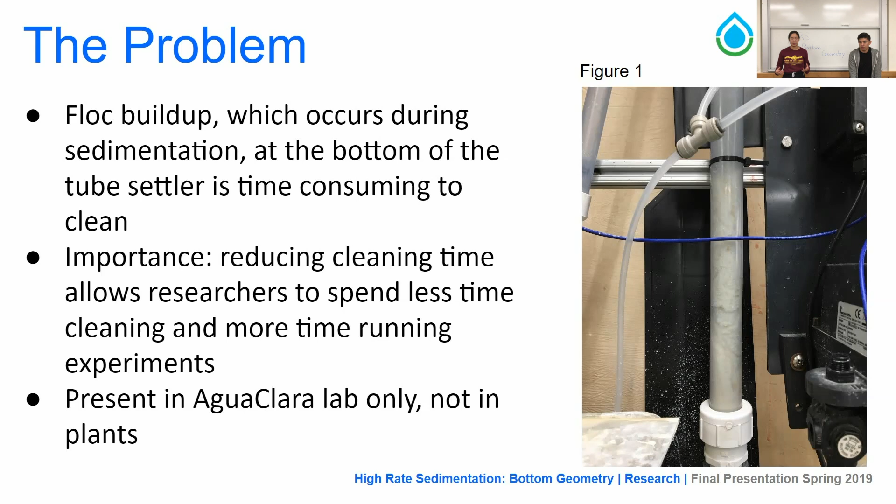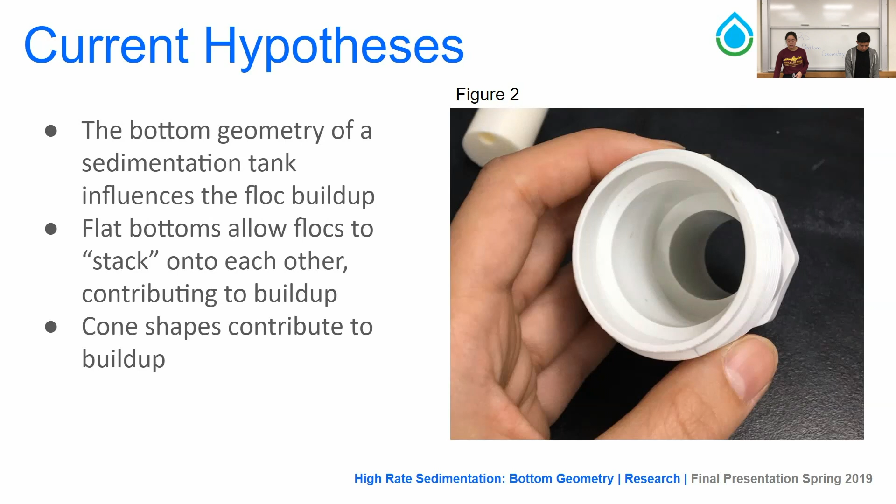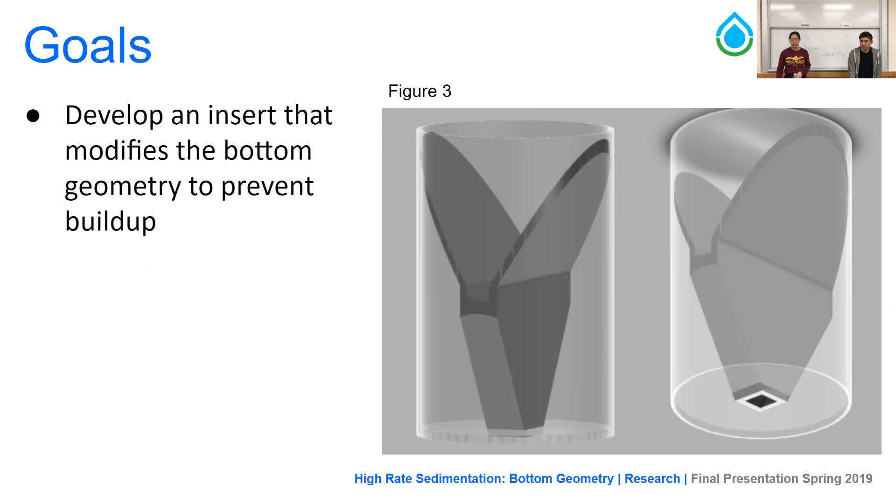The current hypotheses that we're running our experiments off of is that the bottom geometry of a sedimentation tank influences the floc buildup, and flat bottoms allow flocs to stack on top of each other, contributing to buildup. This is an image of the coupling that is in the bottom of our apparatus. We've also determined that cone shapes contribute to buildup. Our goals for this semester are to develop an insert that modifies the bottom geometry to prevent such buildup. So here is an image of one of the geometries that we will be testing this semester. And Luis will talk more about our previous work.

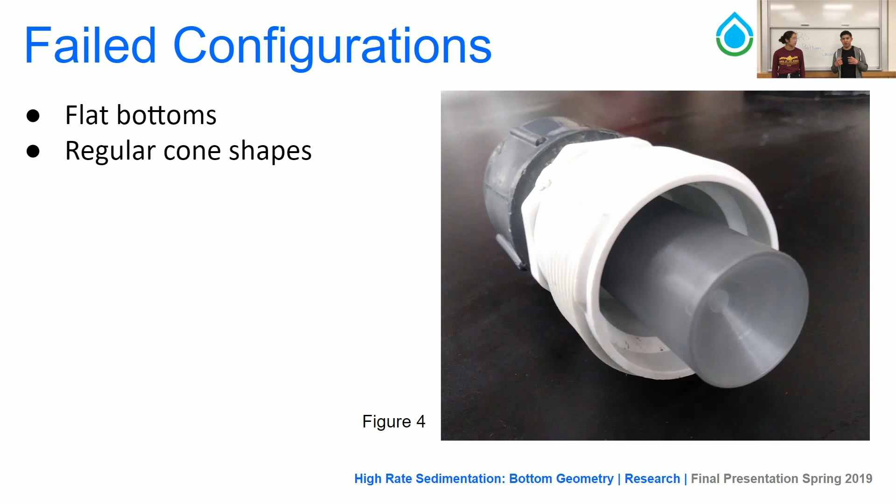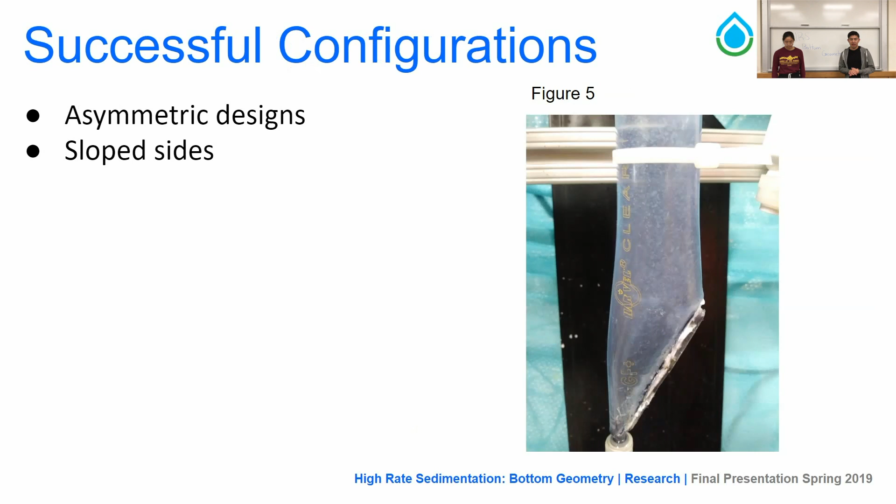Okay, during the summer of 2018, that sub-team discovered that flat bottoms don't work because they lead to gelling, and that regular cone shapes don't work as well, as can be seen by that diagram, because it allows the flocs to stack up in rings instead of just onto each other, but that's still a problem. But what they did discover was that slanted slopes are a good design because they allow the flocs to resuspend and the gelling to occur less frequently. The floc resuspension can be seen in this video.

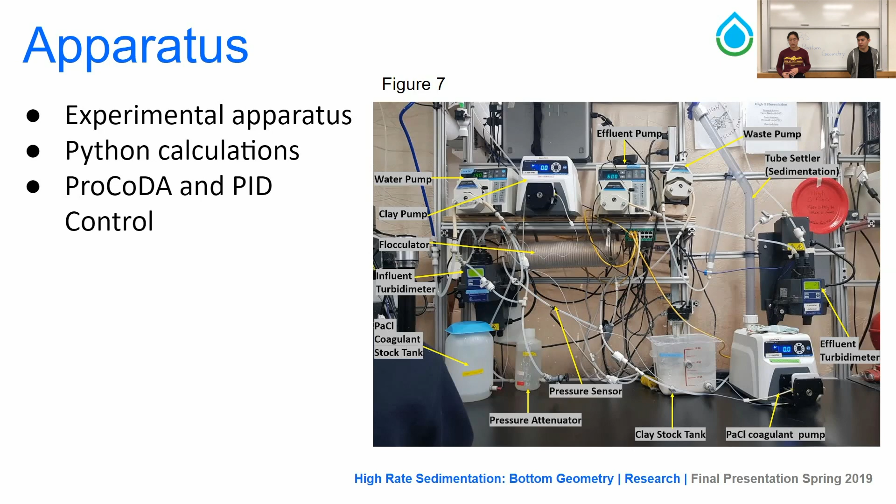Yeah. And I'll talk more about our methods. So here is an image of our apparatus. It consists of 5 pumps, 2 stock tanks, one for clay and one for coagulant, 2 turbidimeters, and our tube settler, which is where sedimentation occurs, and it's also where we experience floc buildup. We use Python calculations to figure out the RPM for the water and the coagulant pump, and we use ProCoDA and PID control to control the clay pump to ensure that the influent turbidity is 100 NTU.

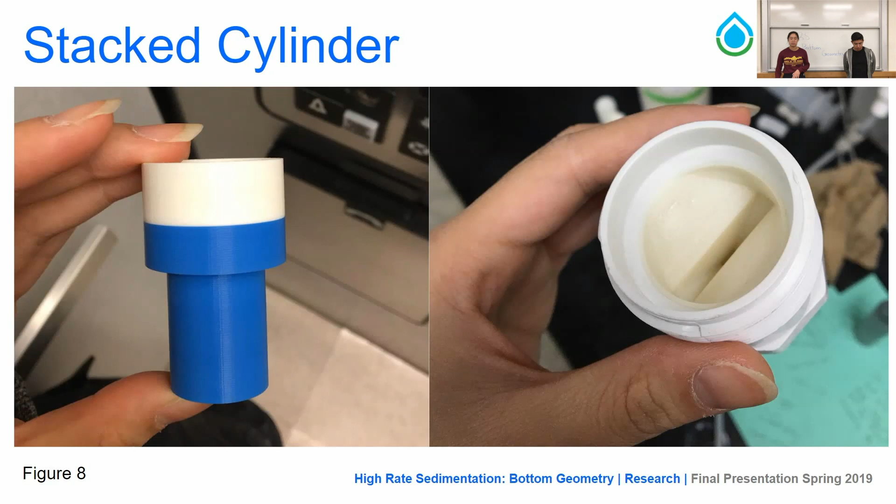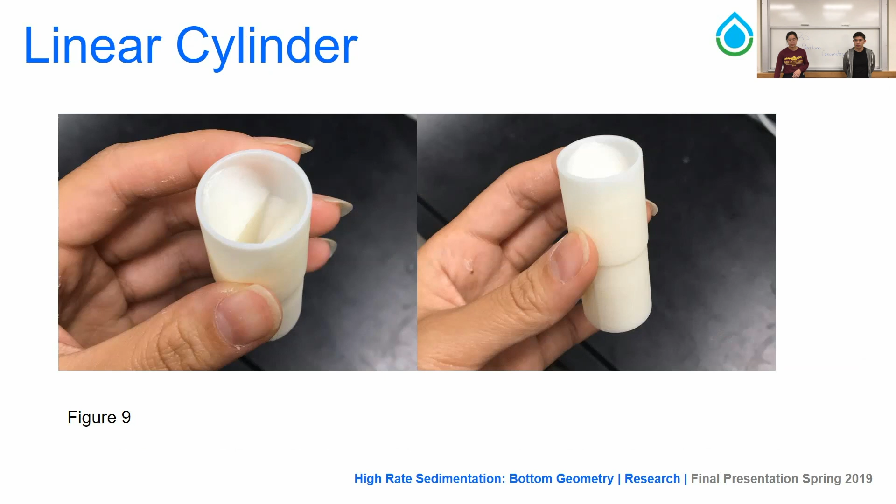Here is an image of our stacked cylinder. It's one of the inserts that we designed this semester, and the top portion reflects the same geometry that we had in a previous image. And here's an image of our linear cylinder, and the difference is the angle and also the shape. And I'll talk more about our results and analysis.

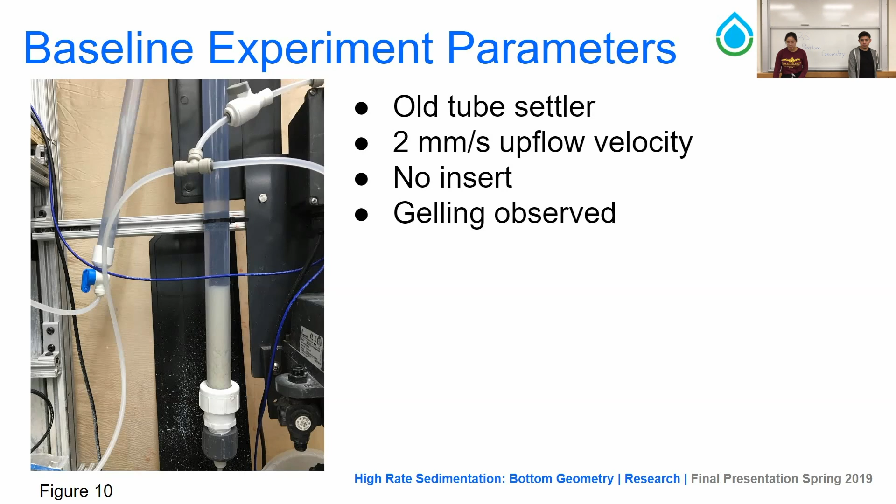So here is an image of our baseline experiment. The parameters include that it ran using the old tube settler and at a 2 millimeter per second upflow velocity. We also didn't use an insert for this experiment, and as you can see in this figure, gelling was observed. So here is a graph of our results, and you can see that there's an exponential increase in turbidity depicted with this orange regression line. Because the coupling had a flat bottom, flocs were able to stack on top of each other and produce the buildup that was seen in the previous slide.

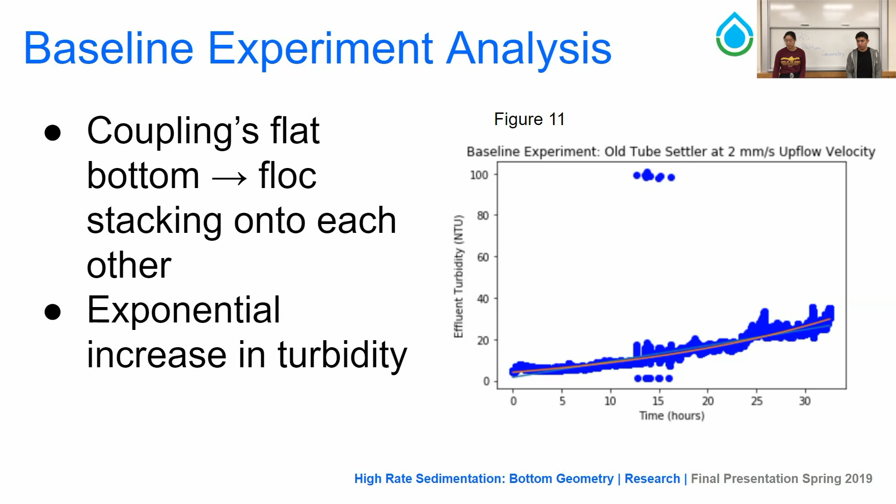And these are the results from our stack cylinder. The slope angle of the stack cylinder was 41 degrees. This experiment was run using the old tube settler and at a 2 millimeter per second upflow velocity.

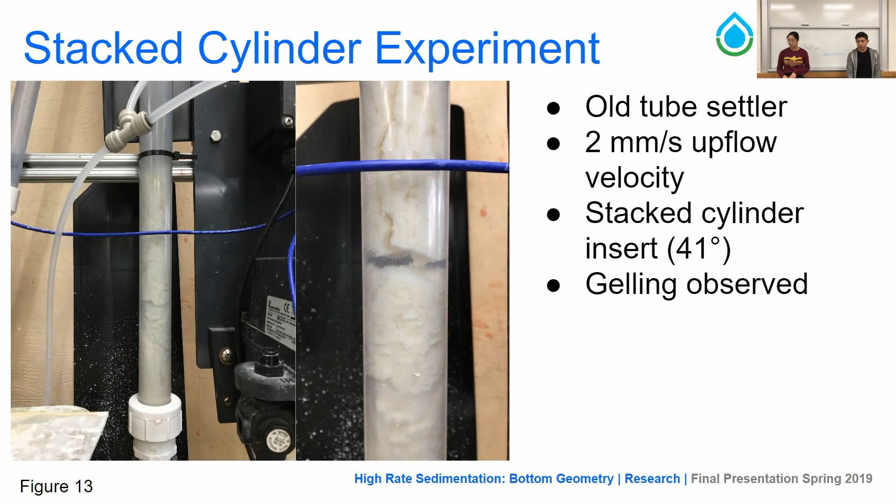And as you can see in this image, gelling was observed. So here is the graph of our experiment, and you can also see again that there is an exponential increase in turbidity depicted by this orange regression line, and gelling still occurred. So we had to take into account rolling friction and the equation Q equals AV in our analysis.

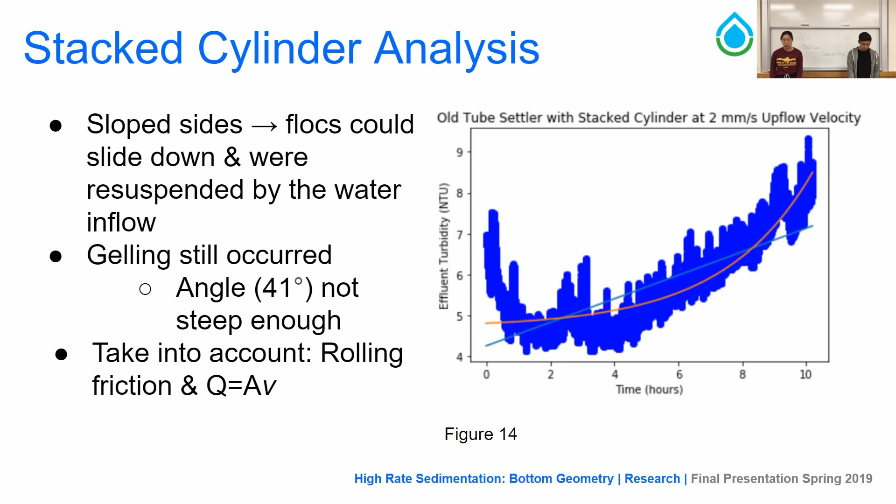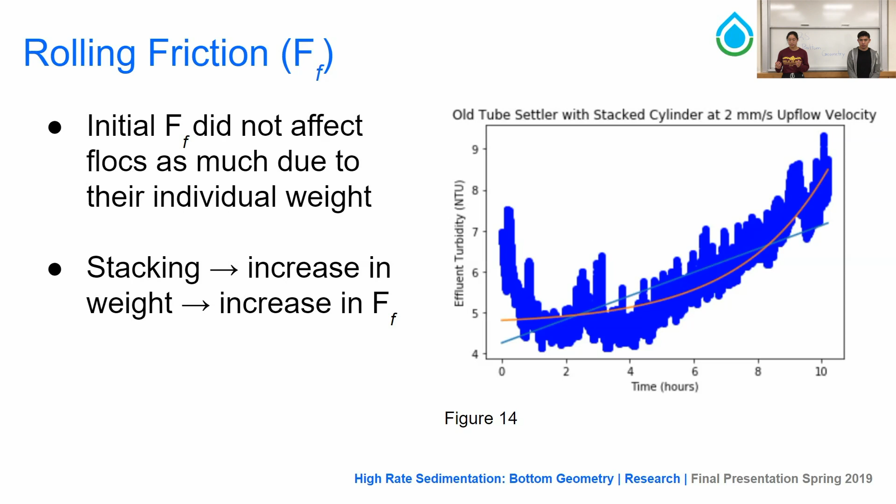So starting with rolling friction, initial rolling friction did not affect the flocs as much due to their individual weight, but as the flocs began to stick to each other more and increase in weight, rolling friction began to affect them more, and they started to slide down the slope more slowly. Because of that, flocs had the opportunity to stack on top of each other and increase their weight, which would also increase the stacking and the amount of buildup that was produced.

We also took into account Q equals AV. So Q equals AV represents flow rate equals area times velocity. Our flow rate was held constant, but the area began to decrease due to floc buildup. So velocity V had to increase to compensate for the decrease in area. And because the velocity was continually increasing, flocs could not recirculate and resuspend and therefore began to stack more on top of each other.

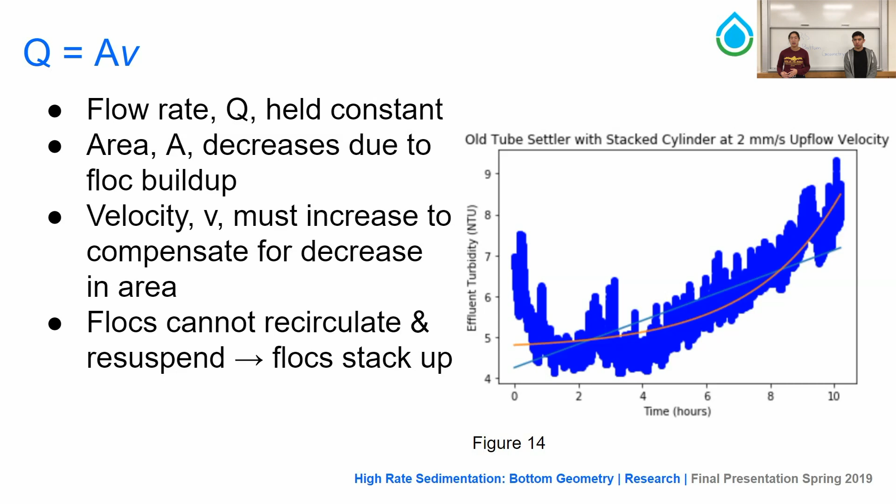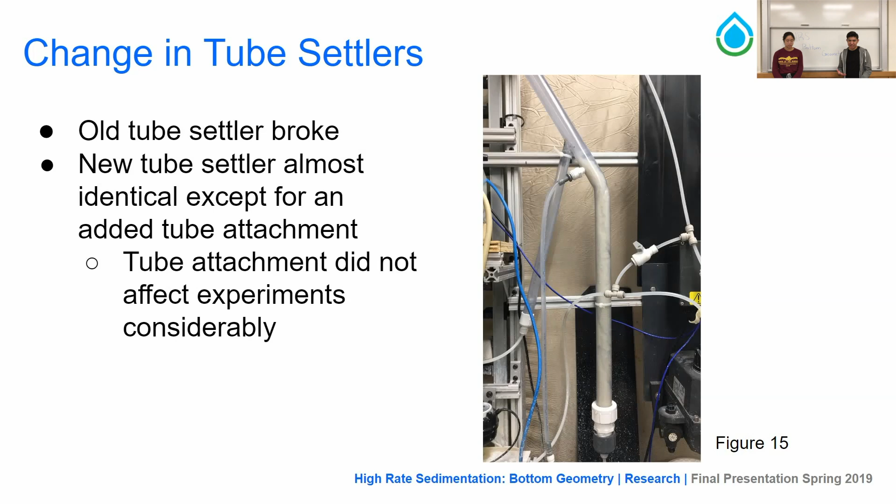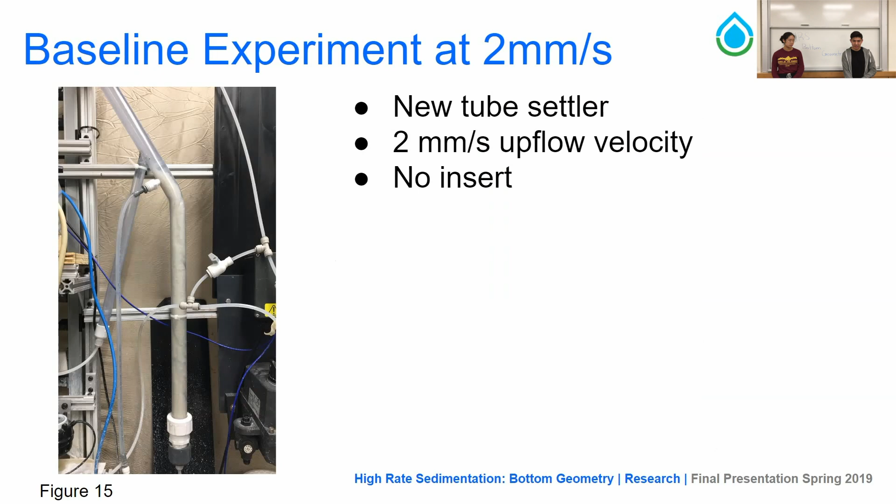Okay, so due to an incident in the lab, we had to change tube settlers, but the new tube settler was very similar to the old tube settler except for an added tube attachment, and that did not affect our experiments. So we ran another baseline experiment with the new tube settler still at 2 millimeters per second, and we obtained similar results, and as can be seen in the picture, gelling still occurred. And these are our results.

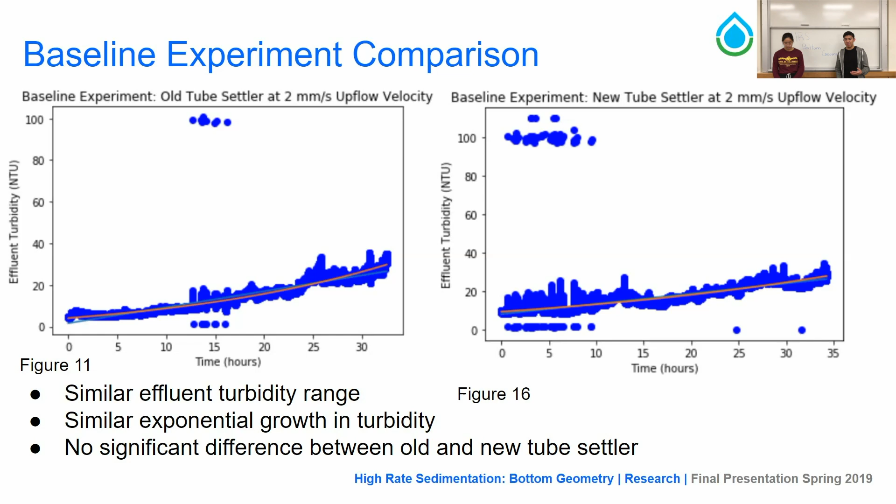The figure on the left represents the old tube settler results, while the figure on the right represents the new tube settler results. And as can be seen, the effluent turbidity was still around the same range, and there was still an exponential increase in effluent turbidity, which again meant an exponential decay of our floc blanket.

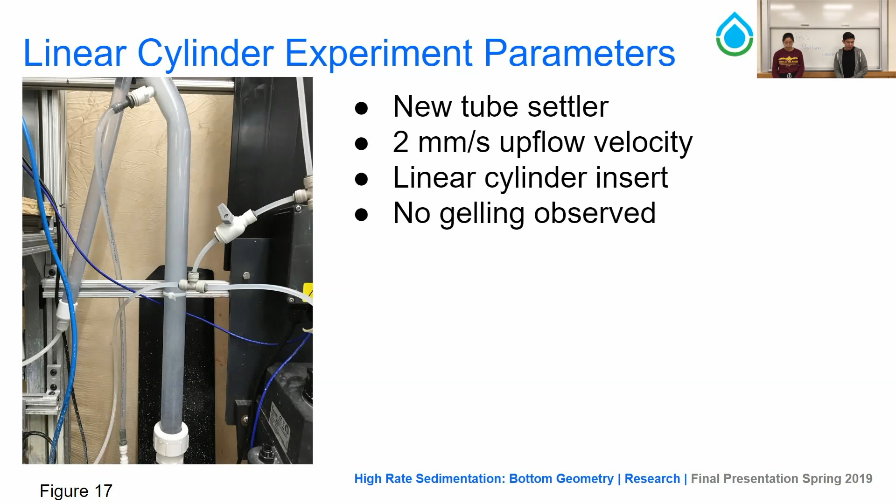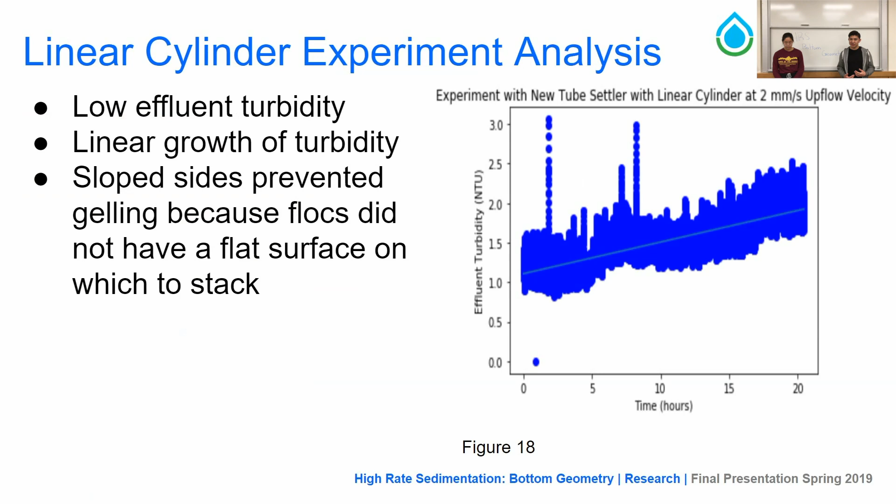So once we ran our linear cylinder experiments with the new tube settler, we obtained this result, as can be seen from the picture. There was a lack of gelling, and from the results that we obtained, there was a low effluent turbidity, and there was also a linear increase in the effluent turbidity, which corresponds to a linear decay of the floc blanket, which is what we want in our experiments. And this meant that we were getting positive results.

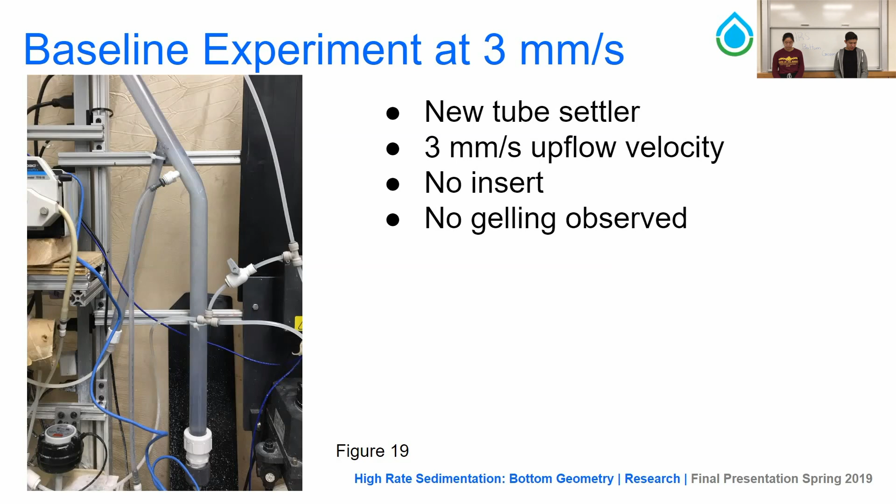We ran another baseline experiment, but this time at 3 millimeters per second. As can be seen in the picture, there was no gelling once again. And with the results we obtained, yes, the effluent turbidity was high, but it still decayed. There was still a linear increase, not exponential. So this is what we want, and so we deemed it unnecessary to run an experiment with the bottom geometry.

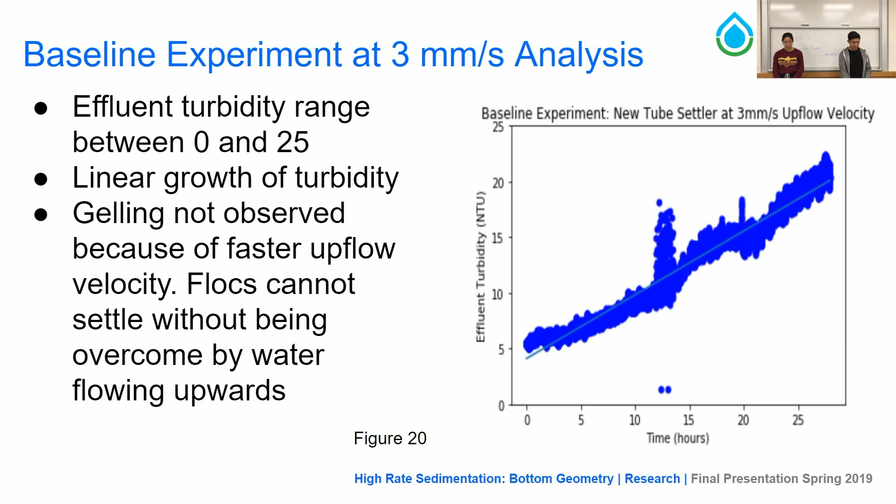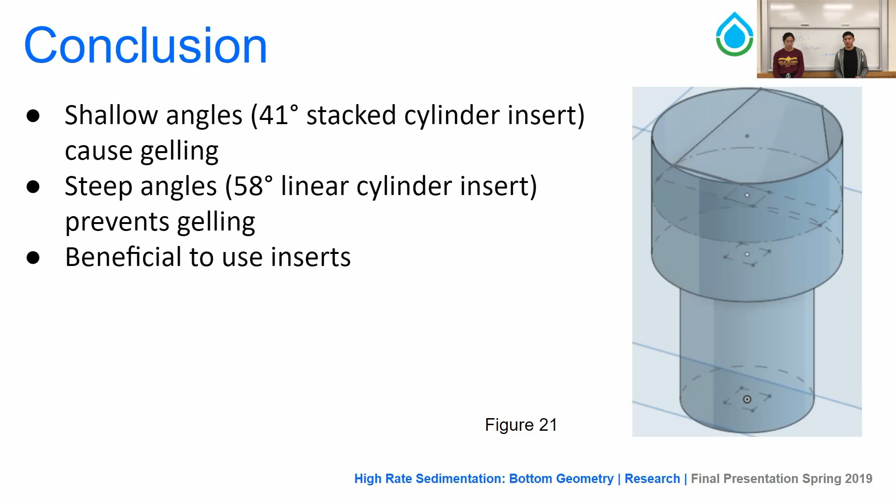And we have concluded that a 41-degree angle doesn't work because it still allows for gelling to occur, whereas a 58-degree angle is very beneficial because it leads to no gelling, which is what we want.